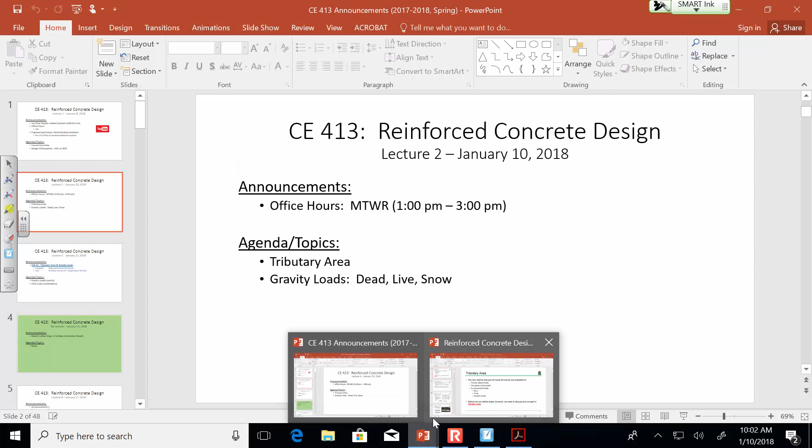All right, so I want to get into tributary area today, because by and large your homework 1 is going to discuss reviewing tributary area and gravity loads.

We kind of talked about this last time but didn't get into any major examples. Let me briefly recap. We introduced the course, but one of the big ideas we got across was this idea of uncertainty in engineering and the idea of a design philosophy. Instead of just blanketly applying a factor of safety, in structural engineering we apply different load and resistance factors depending on what we're talking about—different factors for dead loads than for live loads, etc.

So what I want to talk about today is the load side of things and look at tributary area and how you actually perform a load takedown. In other words, given a typical representative real-world structure and some representative real-world loads, how do you take that real-life scenario and turn it into a simply supported beam with a uniformly distributed load—something that we all can analyze and ultimately design. That's the point of what we're talking about today.

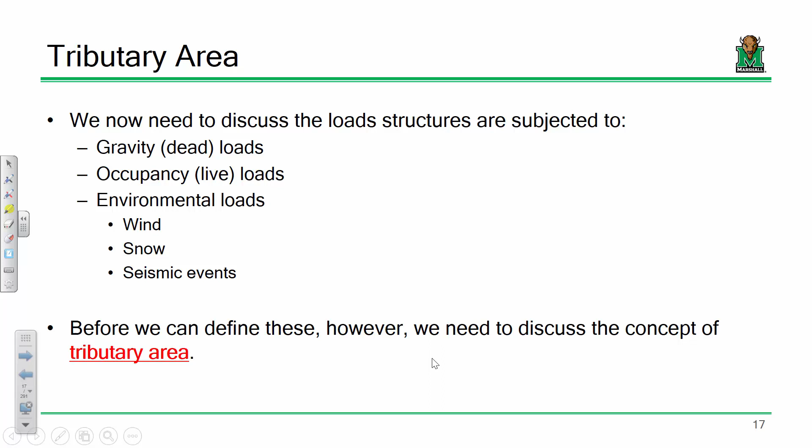In order to do that, you need to understand the concept of tributary area, which is how much of a given floor system a particular member is responsible for. We talked last time about how that's typically defined as halfway over. So if you have a bunch of floor beams supporting a given floor area, one floor beam is responsible for all the floor area halfway over to the next one and halfway over to the next one. That's how we're going to generally define tributary area.

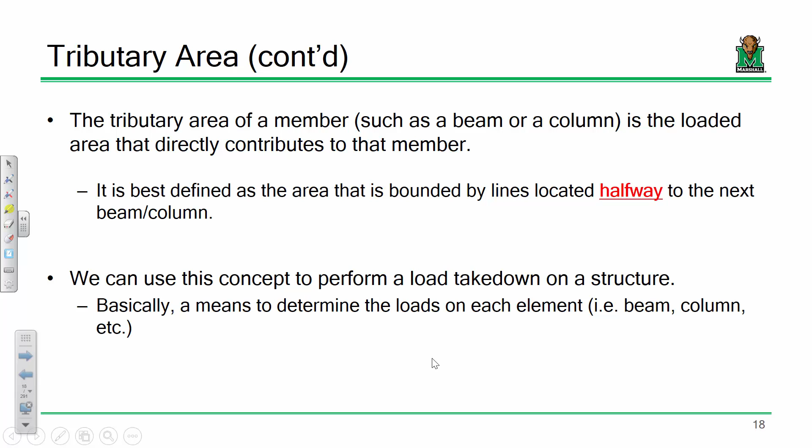So what we're going to do here in a little bit is take a representative floor system, very similar to this one, and take a floor load of about 20 to 25 pounds per square foot. We're going to take that load and start developing analytical models that we could analyze and then design.

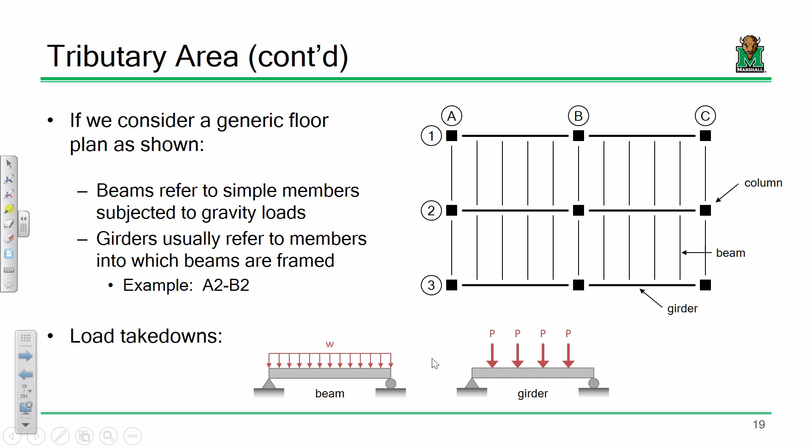So just so everybody remembers, think of this sort of like a hip bone connected to the leg bone type of analysis. If I'm standing on this floor, where does the load go? It goes from the slab to the beam, then from the beam to the girder, from the girder to the column, from the column down to the ground. Does that concept make sense? Are you okay with that?

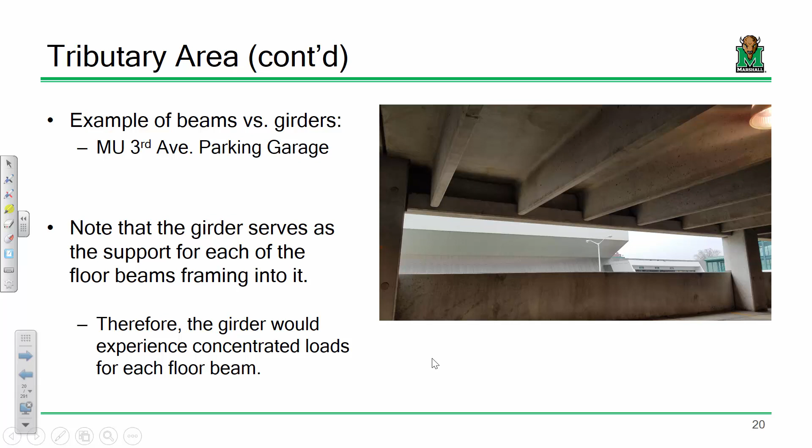Okay, so here's the floor system we're going to look at. The black squares on the diagram are columns. Imagine we're sitting in a helicopter looking down. We see the columns sticking out of the ground, and a series of floor beams going vertically and a series of girders going horizontally.

So for the example, we have a load of 20 pounds per square foot. What we're going to do is tributary area sketches for the following elements: a typical interior beam, a given girder, and a given column, though we can extend this to look at everything. Then we'll determine the load on a typical interior beam, the loads on a given girder, and the loads on a given column. Does that sound good? Are you okay with that?

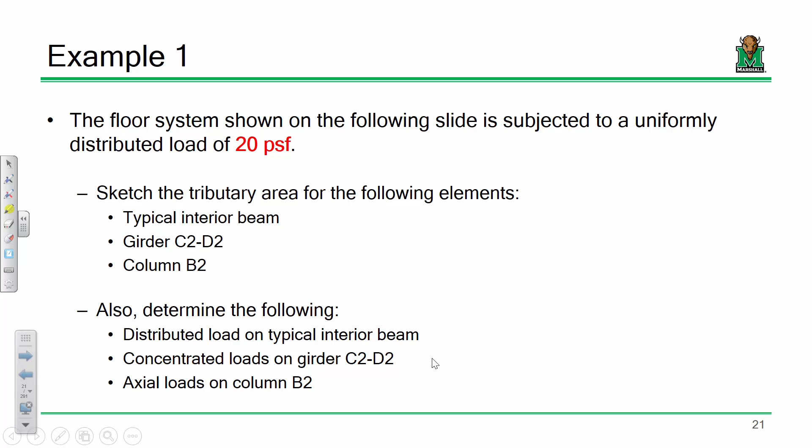Okay, so let's start off with a typical interior beam. Let's say we're looking at, let's see, we got C2, D2, C2, D2. Let's say we're looking at this beam right here. So just so everybody's familiar and aware, the tributary area for this beam is defined as all the area halfway over to the next floor beam and halfway over to the next floor beam.

Would you agree that the tributary area would probably look something like this? This would be the tributary area, how much that floor beam is responsible for. Anything past that on the left or right, this beam's going to take over. Anything on the left side, this beam's going to take over. And anything above this, well, this beam's going to take over. Does that make sense? You're just dividing up the floor into how much a given element is responsible for.

Make sense? Okay. Now, just so everybody's clear, how long is this floor beam? 30 feet, okay. All right, yes? Well, that's okay. So if you're standing in the middle, half goes here and half goes there. You see what I mean?

One thing to keep in mind, you're thinking about an individual person, but keep in mind when we look at live loads on floor systems, we're not really looking at individual people. We're looking at this as if we have an average pressure load. We've got maybe 30-some people in this room. What we would do is idealize this as something like 50 pounds per square foot. Even though different people are split up to different beams, on average this 50 pounds per square foot, half of it's going to go here and half of it's going to go there. Does that make sense? I see the temptation to treat individual people like, well, where does an individual person go? But we're not really treating it like that.

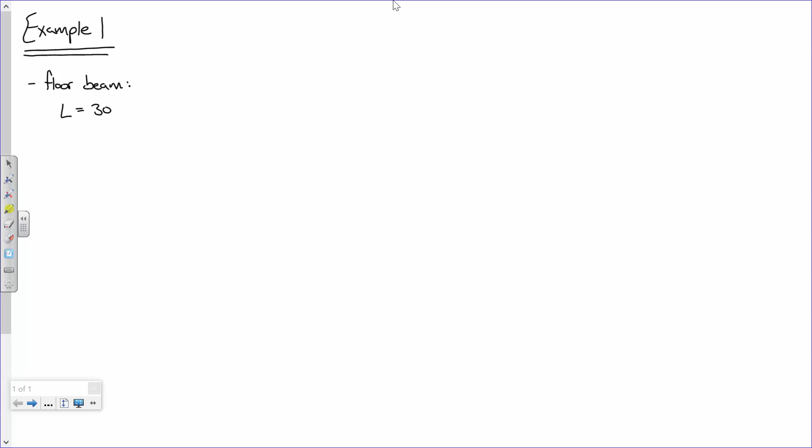And we'll call the tributary width 10 feet. Everybody okay with that? So while we're not going to directly use this right now, what would the tributary area be? 300 square feet. We're not going to use that right now, but we will use it later when we look at reduction. We'll get to that in a little bit.

Sound good? Now remember, we've got floor beams that are spaced every 10 feet, so if I were to look at this floor system, it might look kind of like this. I'm going to do my best to get my artistic representations accurate. I can do a little better than that. Okay, no, I can't, we'll just leave it at that. You know what, this is going to bug me, I'm doing this again.

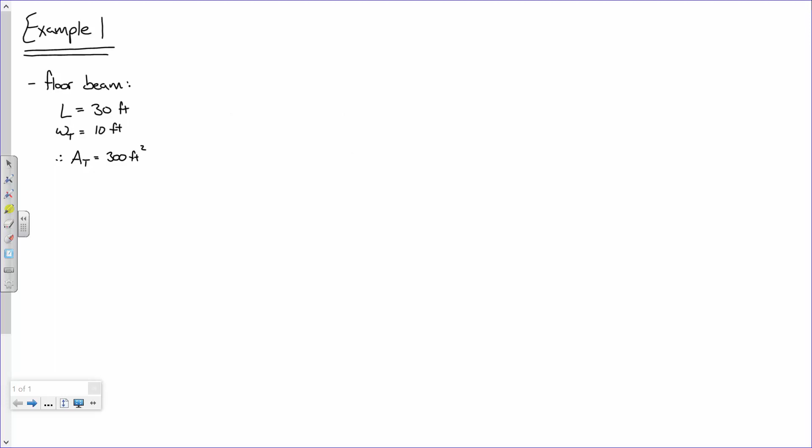There's a point I'm getting at with this. I sort of need three. Okay, I like that one better. Well, you can deal with it. All right, so let's say I've got floor beams and they're going on forever. Even though there's only like 5, we'll just say they're going on ad infinitum.

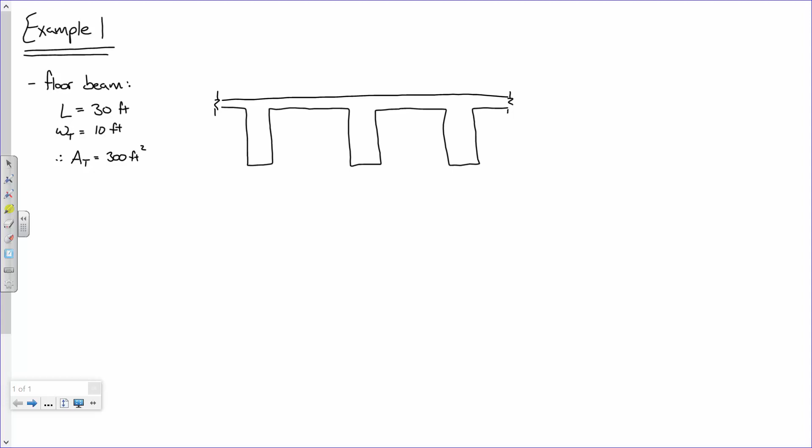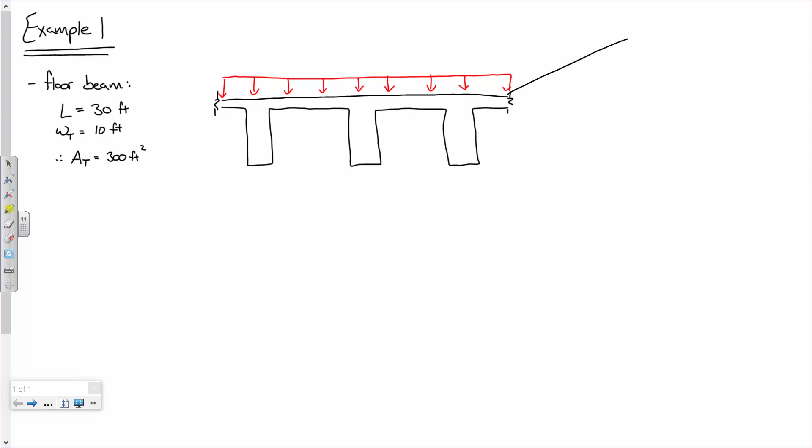Now, again, we're treating our load as if we have a uniform pressure load on this floor system. So imagine that you have a pressure load that looks like this. And keep in mind, this is 3D, okay? The floor system sort of goes like this. So you have a floor load, or pressure load, that's being applied over this entire floor system. So it's something like that.

Sound good? Okay, now just so everybody's clear on the dimensions, this pressure load is 20 pounds per square foot, and we've got floor beams that are spaced at, what did we say, 10 feet? Yeah, there we go. 10 feet and 10 feet, okay?

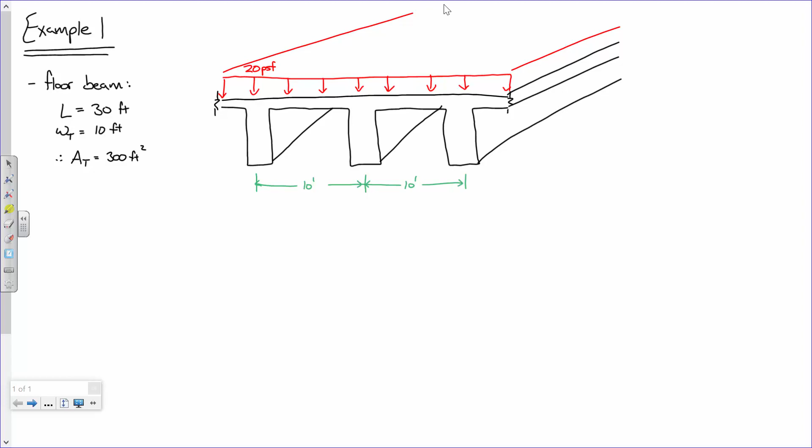Okay, and so this dimension is 10 feet. Let's see, this is testing out my 3-dimensional art abilities, my perspective. That's not bad, that's about the best you're going to get out of me. Thank you, thank you, okay.

Now what we're going to do is this: when we analyze a beam in structural analysis, we analyze it as if it was a line, just a single line, hinge, roller, etc. So what I'm going to do is take that pressure load and idealize it as if it was a uniformly distributed load along a single beam. In other words, I'm going to take this and turn it into this. I'm going to say, what if we were just looking at that beam, and instead of this pressure load, let's look at it as if it was just a single uniformly distributed load.

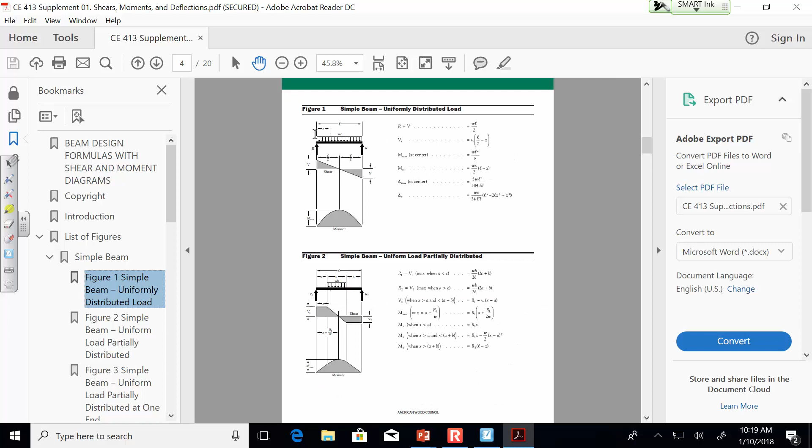If you go to the very first one, which is on page 4 of the handout, look right here: simply supported beam, uniformly distributed load. Here's your reaction, WL/2. So if you have 200 pounds per foot, 30 foot, plug and chug. What's the shear diagram look like? You go up, down - so down, lot to a little to a lot. Y'all remember that? Bam, there's your formulas.

I know you're sitting here going, now why didn't you give that to us last semester? Like, really? You show us this now? Well, the point was so that you would understand this when you got it. So you got to walk before you can run, right?

So what this - let me say this, okay? Because I know some of you are going to ask, well are we going to get any crazy, complicated structural analysis problems in this class? The answer is not likely, okay? This is not structural analysis, this is reinforced concrete design. Everybody in this room already proved to me that they can perform structural analysis because they passed the class, okay? That doesn't mean that you don't need to understand some basics, okay?

And I also want to emphasize that if you don't understand how to use these guides, don't use them - break out the structural analysis that I taught you last semester. But these guides can save you a little bit of time. In other words, if you have a simply supported beam with a uniformly distributed load and you need to know the maximum bending moment, you can do the reactions, draw the shear diagram, draw the moment diagram, because I know everybody here can do it, or you can say WL squared over 8 because it's right there, okay? So you can use it or not. I just wanted to make them available to you. Sound good? Any questions? Okay.

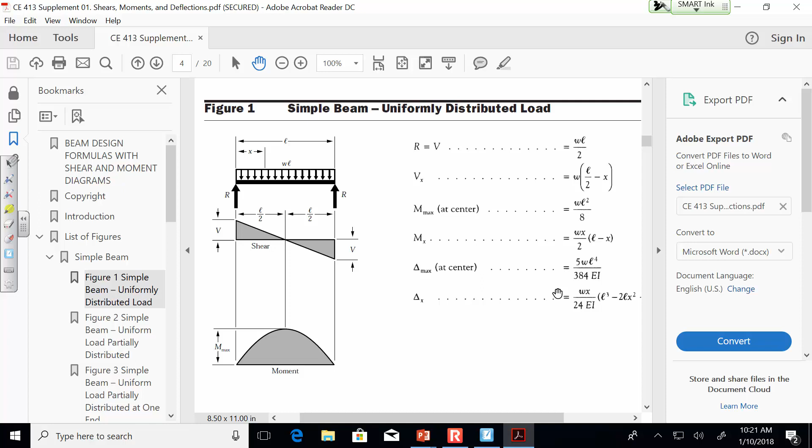Now, so I'm not going to continue this analysis portion any further because you've got this. And from here, if you all can't draw the shear diagram or the moment diagram, well then I failed as a professor last semester. I know you all can do this. So, all right, now - oh, wrong one.

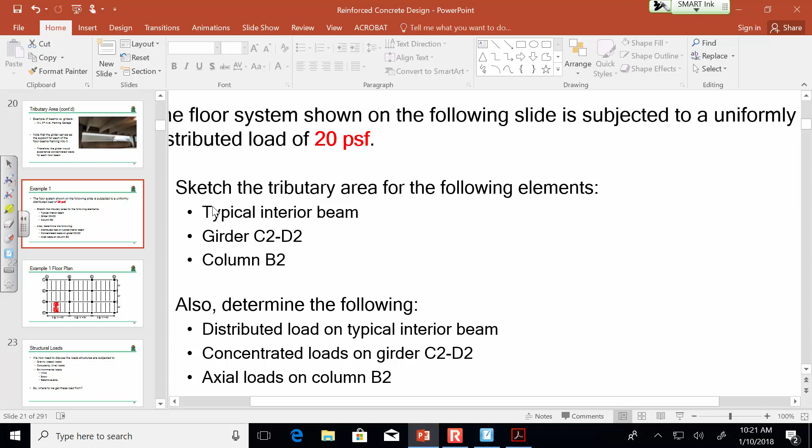Now let's go back to the example. Okay, so we've handled a floor beam, now let's look at a typical girder. Let's look at C2D2. Okay, so C2D2, we're looking at this right here. Okay, so here's our floor. Yes.

So, what you just said covered the first bullet point. Yeah, basically. Does it matter how we'd locate which one we did? It won't matter, that's a good question. So you're saying like which one that you did? Let me ask you this: is this one gonna be any different than that? They're all the same, yeah.

Now for girders and for columns, that's where the C2D2 or the column B2 comes into play, because that's where the grid reference comes into play. For a typical interior beam, it's not going to matter.

Now let me follow up with that. Let me ask you this: what's the difference between a typical interior floor beam and a typical exterior floor beam? I'm curious. What? These floor beams, and by exterior floor beams I mean the ones along the lines either D or A.

The difference between these floor beams is that the tributary width is only 5 feet instead of 10 feet. Make sense? So theoretically, these floor beams would be a little smaller. They're not as responsible for as much. Okay, now that is only if they are subjected to floor loads. That might not be the case.

What goes all the way around the outside of buildings? The wall, the facade, either brick or precast. And if those are mounted on, let's say, the exterior beams, then they're going to be subjected to a lot of load, not just the floor load inside the given floor, but they're also going to be subjected to that load around the wall.

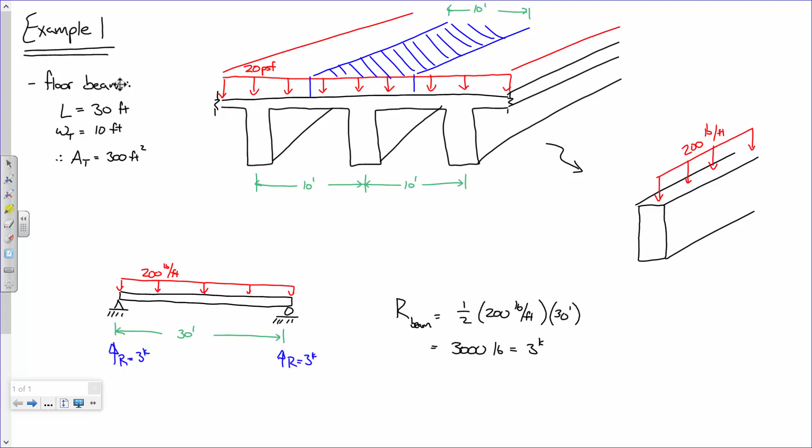Let me go back to this. Here's my beam, right? And we said that - this has a support reaction of 3 kips, and this has a support reaction of 3 kips. Where is that beam framing into? Is that connected to the ground? No, it's connected to the girder. So why don't I do this - instead of treating my girder as if it's another beam, why don't I do this?

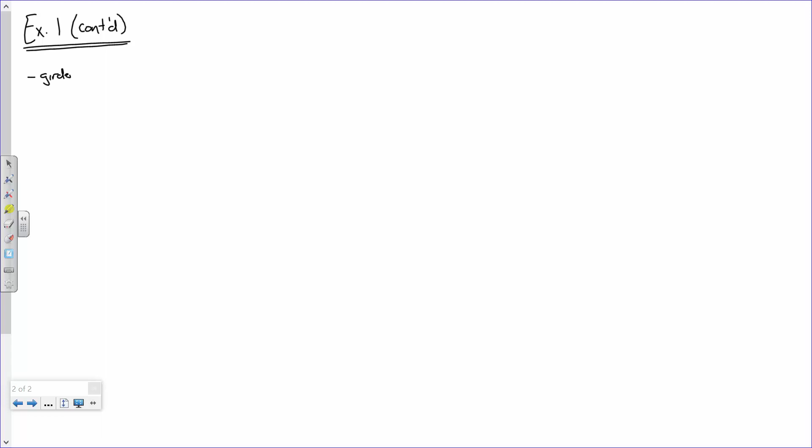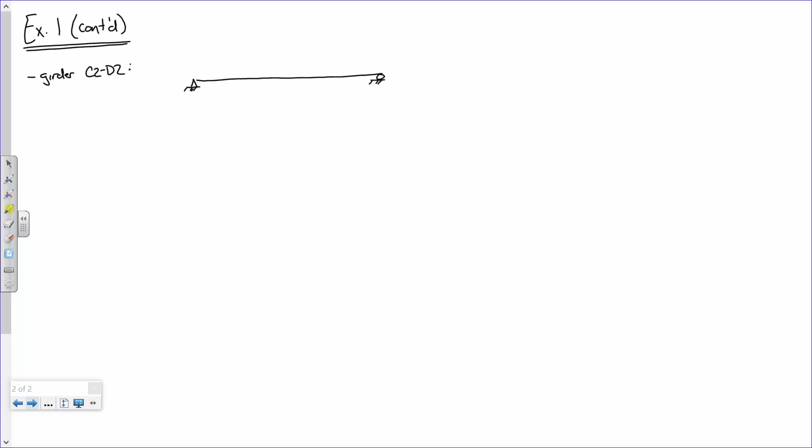So girder C2, D2. Why don't I do this? Why don't I say I've got an element that's how long? How long is the girder? 50 feet. But instead, I've got 4 point loads framing into it. So this is 10 feet, this is 10 feet, this is 10 feet, this is 10 feet, and that makes this 50 foot long.

Now, how much are each of those point loads? Somebody's saying 3 kips. Are they 3 kips? They're 6 kips, right? Why are they 6 kips? Because there's 1 on each side, right? So here's the floor system. I've got this floor beam carrying 3 kips over, but I got this other floor beam that's carrying 3 kips over too. So I got 6 kips here, 6 kips here, 6 kips here, 6 kips here.

What if I was doing this one, C1D1? It'd just be 3, right? Make sense? Because, all right, here's a floor beam, right? This floor beam has 3 kips here and 3 kips there, right? But so does this one. So you're taking the 3 kips from what we got before. This floor beam had a reaction of 3 kips on each end.

But that's the same for all the floor beams in the system. What I'm saying is, right here at this point, how many floor beams frame in here? 2, right? Think, this is a floor beam and it's got support reactions. Those support reactions are going right there. So I've got 3 kips from this side, 3 kips from this side. Does that make sense? So that beam is 3 kips per foot. No, the beam, not the girder. No. All right, let me do this, okay?

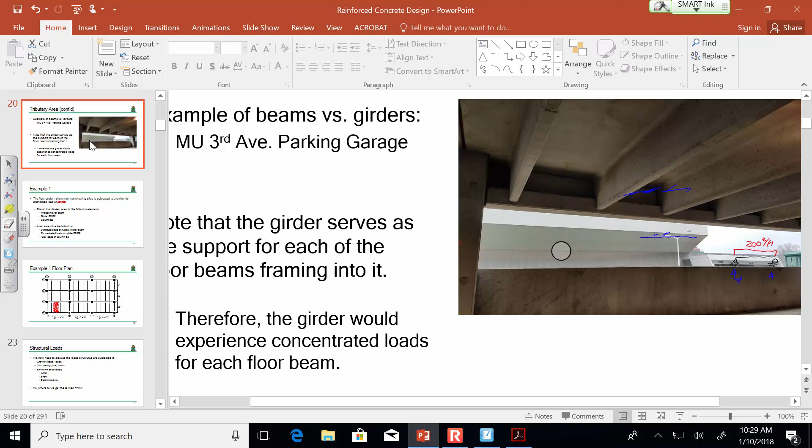Think about this. Here's the beam, right? The support is not the ground. The support's the girder. That 3 kips is going right here. But keep in mind, the difference between what you're seeing in this image and what we're looking at with this beam is that there's another beam on the other side of it. So there's 3 kips here and then 3 kips there. Does everybody else see that? Everybody okay with that? Okay.

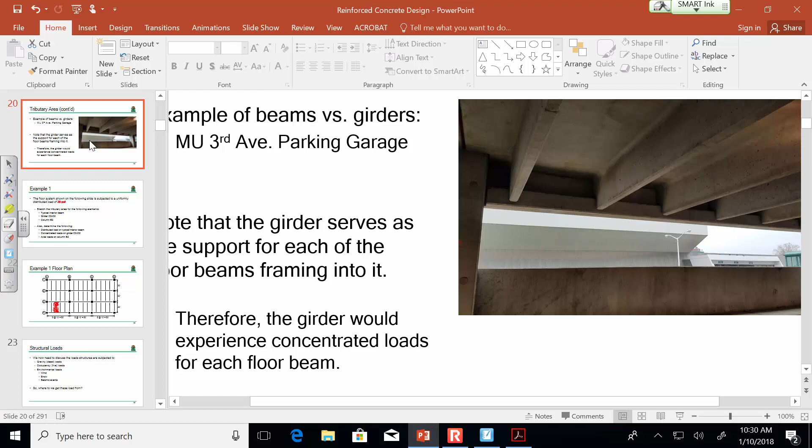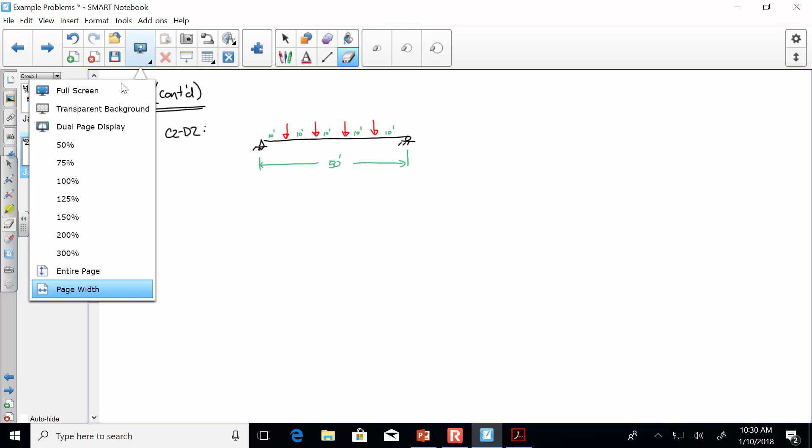So I propose, now I'm going to have to redo that here in a second. I propose that if here's my analysis model, this is 6 kips, this is 6 kips, this is 6 kips. Exactly. Does this all make sense? That's where the beams are going in. Exactly. So what would that make the reactions then in this case? 12, right? This is 12 kips, this is 12 kips. Is this making sense? Is everybody okay with this? Hip bone connected to the leg bone, right?

Now, what's my shear diagram going to look like? I'm just curious. It's going to go up 12. Then it's going to kind of look like a stair step, right? It's going to go boop, boop, boop, boop, boop, boop, boop, right? Make sense? Yes. Yeah, and I'm going to get to that here in a second. Just bear with me. Okay. Any questions so far? Okay.

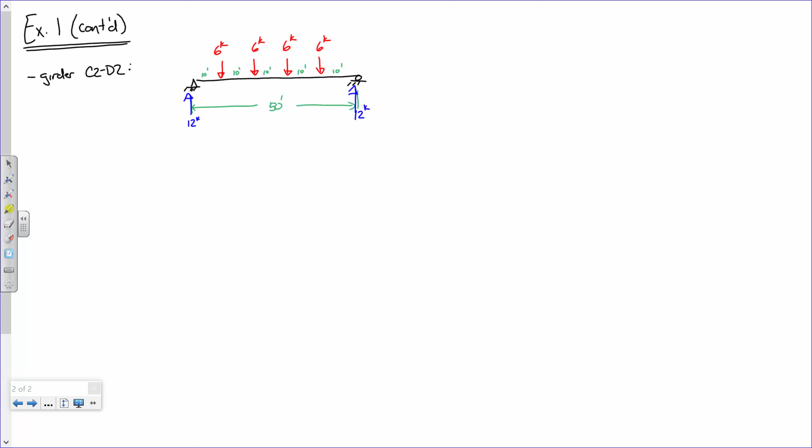Now Mr. Masters is asking, what if you treat it as if it's a distributed load? Okay, you will get slightly different answers. The question though is, when do you do one versus the other? Here's my answer. And this is a rule of thumb. This is where engineering judgment comes into play, but statics would dictate that you always do this. Hip bone connected to the leg bone. You always frame support reactions into the girders. Girders go to the column go to the ground. Now, if we're looking at a given girder, we have what?

1, 2, 3, 4 floor beams framing into it, right? What if we had 40 floor beams framing into it? Just bear with me, okay? You would agree that the shear diagram for this structure right here looks like this. We'd go up, we'd go over, go down, go over, go down, go over, go down, go over, go down, go over, go up, right? That's with 4 floor beams, right? Let's say we had 40. If you had 40, it'd be like, right? That's essentially what it would look like.

Well, if it's that many, why not just treat it as a distributed load and just do that? You see what I mean? Okay, so you want my rule of thumb? If you have more than 4 floor beams, just do the distributed load. If you have 4 or less, do this. Does that make sense? You will get some slightly different answers, but it's so minor that it doesn't really matter.

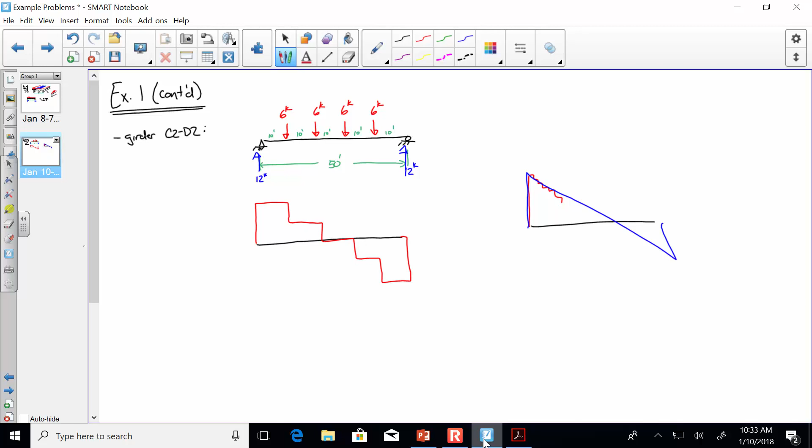I would do it the area way if you had like 5, 6, or 7 floor beams. Exactly like you did this. The only difference is the tributary width would be 30 feet and the length would be 50 feet. Exact same thing, literally just changing numbers. Does that make sense? Everybody else okay with this?

If you got any questions, this is the time. We're also looking at the beams that are going directly to the columns and just kind of disregarding them—they don't go to a girder. Yeah, we're getting to that here in a second, I'm glad you brought that up. So the beams that are going into the columns, that's coming up here in a quick second.

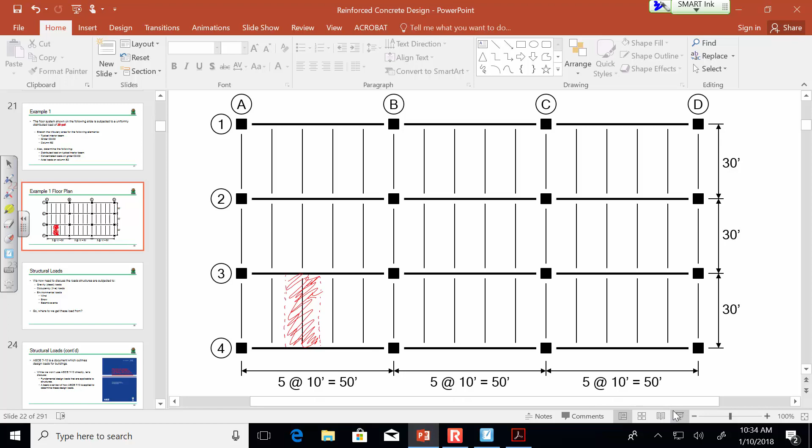Yes? No, well hold on, let me see. What is the number? Let me see, so let's do the math. So here's the, let me do this. Here's the girder, so this is, that's our tributary area. The width is what, 30?

And what was the load? 20 pounds per square foot? So 20 times 30, yeah, it's 600. Did I do that right? 600 pounds per foot, does that make sense? So 600 pounds per foot over a beam that's 50 foot long. Does that make sense? Literally just changing the numbers.

Everybody good? Now, there is an added benefit to breaking them up into point loads, and that's when you look at the columns. Let's look at the columns. Okay, let's look at the columns. So what column are we looking at now?

B2? So what is the tributary area for B2? I would say it looks something about like this. Is that about right? Everybody okay with that? What are the dimensions? What did you say they were? 50 by 30, right? Because if I look on the x-axis, that's 25 and that's 25, so that's 50. On the y-axis, that's 15 and that's 15, so it's 30, right?

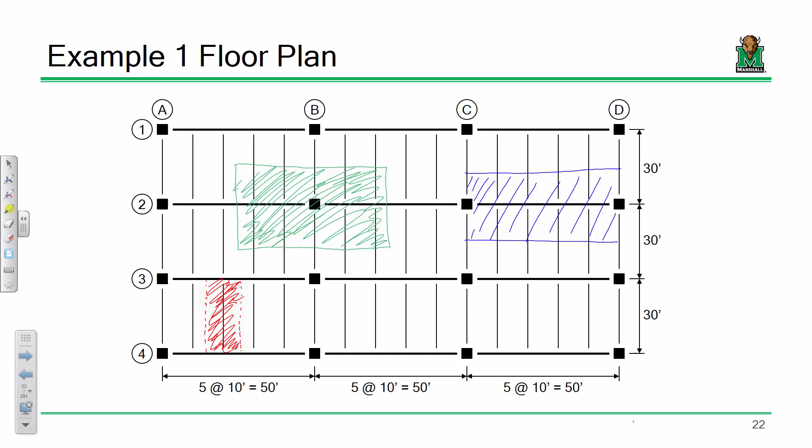Sound good? Now, the benefit of treating them like support reactions, hip bone connected to the leg bone, is what happens with the column. Like, check this out. Okay, all right, so let's look at the column. Okay, so watch this, so method 1.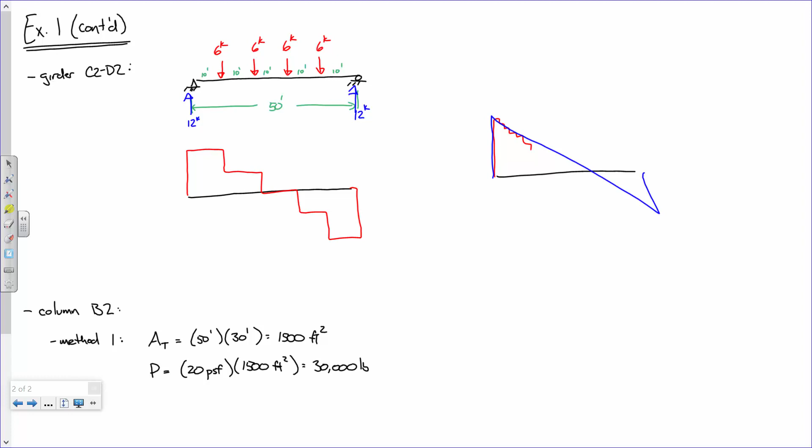What did we say that the tributary area would be? It'd be 50 foot times 30 foot. What is that? 1,500 square foot, right? Now, what's the pressure load? So would you agree that the load on that column is 20 pounds per square foot times 1,500 foot squared, which is what? 30,000 pounds, or 30 kips. Would you agree with that?

Okay, now Mr. Filsinger had a question earlier. He said, well, what about the columns? There's beams and girders framing into it. Watch this. Remind me, what was the reaction that we calculated for a beam? 3 kips. And what was the reaction that we calculated for a girder? 12 kips, okay?

Let me ask you something. Here's our floor system. If I look at column B2, how many girders frame into B2? 2, this one and that one. How many beams frame into B2? This one and this one.

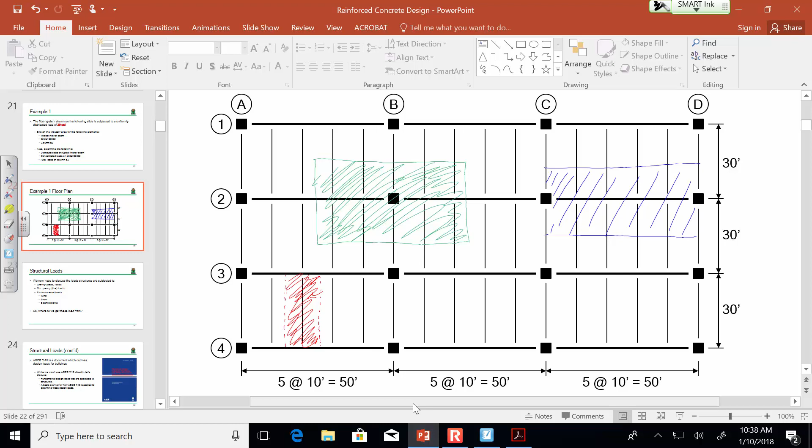So why don't I do this? If I could say that the load on that column is going to be 2 beam reactions plus 2 girder reactions, which is 2 times 3 kips plus 2 times 12 kips. And what does that come out to be?

What do you think? We learned enough today to take Friday off. I didn't say that. Good job. But yeah, good effort, good effort, good effort. What do you think?

Now think about this though: 20 pounds per square foot, that's not a lot of load, but just from one floor we're getting 30 kips on just a single column. Another thing to keep in mind, this is looking at this building as if it was a 1-story building—we're only looking at 1 story. Imagine if this was a 10-story building, we'd have 300 kips on the ground, right? We'd have a column, and as the column went down, it got heavier and heavier and heavier. Does that make sense?

What do you mean start at the top? So you're analyzing a 10-story building, would you start at the top? Because there's nothing above it that you have to worry about. Well, there's snow—I mean, just your normal PSF load, you're accounting for the snow on top of the roof and then going down from there. Let me analyze it, let me answer it like this. Okay, let's do this.

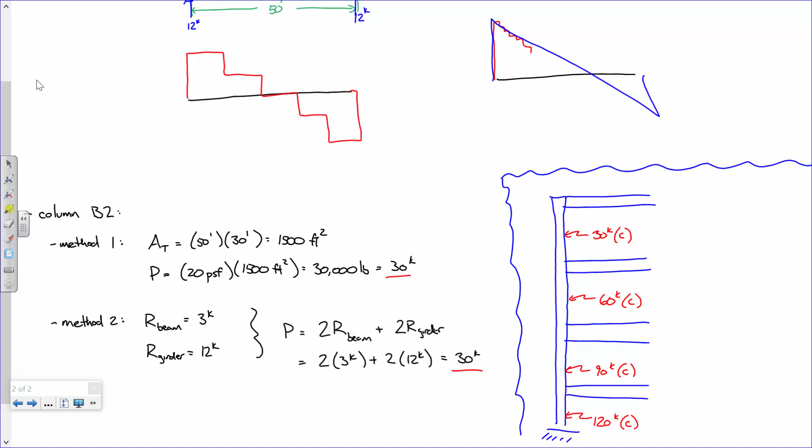What do you think? Any other big questions? You like this? Now you senior design folks are going to get a lot of experience with this here in a little bit. All right. Well, I guess you all will too if I'm teaching it next year. So I'm just trying to get to like 1050. All right, okay, are there any other questions?

So are we ultimately doing all these calculations to be able to say how big our columns are? Yes, that's what design means, to size the individual elements so that they can safely resist those loads. You've got to know what the loads are in order to do that. So yeah, that is the ultimate end goal.

Okay, let me talk a little bit about loads because we need to get into this a bit. We'll continue this on Friday, and then you'll be well prepared to assess your homework. But let's talk about loads. There are really 5 main load components that structures see. 3 of them act in the direction of gravity, which is what I'm mainly concerned with, that you have the ability to assess, and 2 of them act laterally. The 3 that act primarily in a gravity effect are dead loads, live loads, and snow loads. The 2 lateral effects we deal with, meaning side to side, are wind and seismic events like earthquakes.

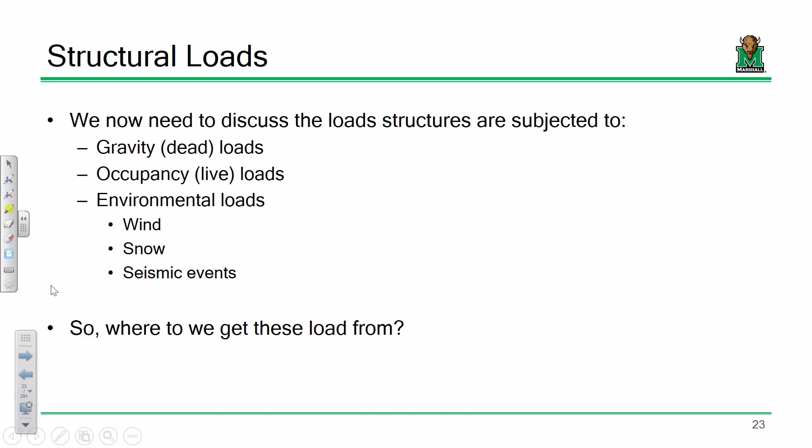But where do you get them from? Where do the loads come from? Like I said, a library is around 150 pounds per square foot, a classroom can be like 40 to 50, something like that. Did I just make that up? Where did that come from? Well, they come from specifications, from published standards within our engineering community.

Now, I know everybody in this room has heard of ASCE, but up until now, ASCE has probably been little more than a social organization where you build a concrete bowling ball, a canoe, or a bridge every now and then. And that's true, ASCE provides that function, but they are much more than that. One of the main roles ASCE plays in the engineering community is providing a lot of the technical standards that we use as engineers, producing standards on how to design dams, roads, and so forth. One of the most commonly used standards is ASCE 7.

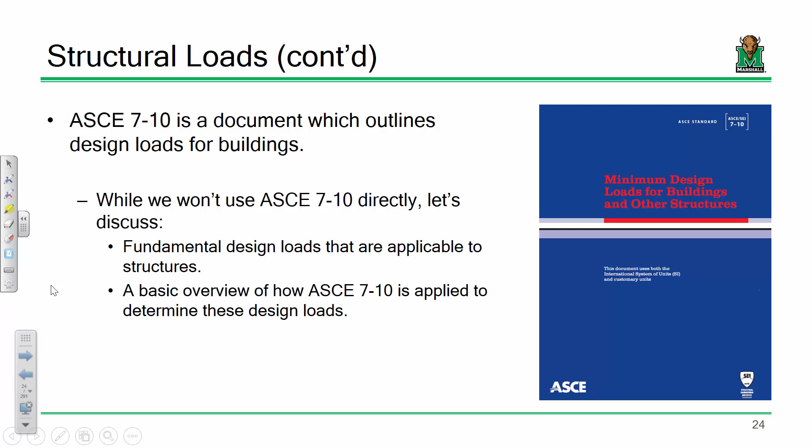ASCE 7 is the standard that delineates minimum design loads on buildings and structures. I have here ASCE 7-10 because that came out in 2010. We actually recently updated to ASCE 7-16, which came out in 2016, but there's not a lot that really changed between ASCE 7-10 and 16 that would affect us. A lot of the gravity load provisions haven't changed for years. The maps might have changed, but I've got an online tool that'll help you with that.

Let's take a moment and talk a little bit about some of these loads. I want to start off with dead loads. Now, whenever I use the term dead load, really what I'm talking about are loads that are stationary, loads that don't move. I am obviously not a dead load because I'm walking right now, walking across the room. But dead loads are loads that are stationary - we're talking about the structure's own self-weight, any permanent attachment, anything that's not going anywhere. And by and large, I'd say 90% of all dead loads that we consider in structural engineering are self-weight, the structure's own self-weight. Now, the most common civil engineering materials that we use are steel and concrete, okay?

Now, just so everybody is aware, the unit weight of steel is 490 pounds per cubic foot. That's a number that you'll want to drill into the back of your head, though not so much of importance for this class.

The one that's important for this class is the unit weight of reinforced concrete. Now, the unit weight of reinforced concrete is variable. It changes. Those of you who had civil engineering materials last semester did the analysis of everybody else's data and calculated unit weights, and they were all over the place, but not crazily so. They did have a little bit of a range.

One thing that should be noted from what we did last semester with the unit weight of concrete: what did those cylinders not have inside them? Rebar. They didn't have any rebar, any reinforcement. So reinforced concrete is a little heavier than regular concrete.

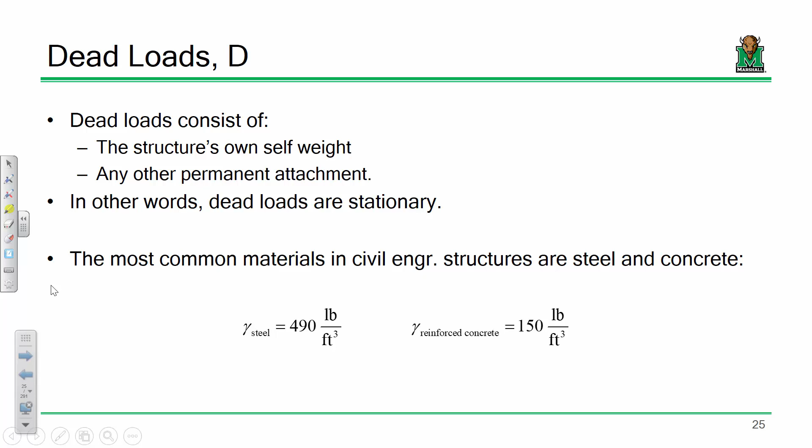What we typically assume in civil engineering is that unreinforced concrete weighs around 145 pounds per cubic foot, and to account for the reinforcement, we add a little bit. So 150 pounds per cubic foot accounts for a bump in weight due to the steel, since steel is heavier. So unless otherwise stated, we are going to use 150 pounds per cubic foot for unit weight for everything we do. We'll reference that number quite a bit, so it's something you'll want to have burned into the back of your head.

Now, if there are any other weights or values that you need, there are really two big places you can get them. One is ASCE 7. If you open up ASCE 7, there are a host of different floor loads, like common floor dead loads. Are you looking at ceramic tile? Gypsum fill? Normal weight concrete flooring? Metal deck? For each of those flooring types, you have a different value — for instance, quarter-inch ceramic tile weighs around 10 pounds per square foot, which is the upper bound value you should use for design.

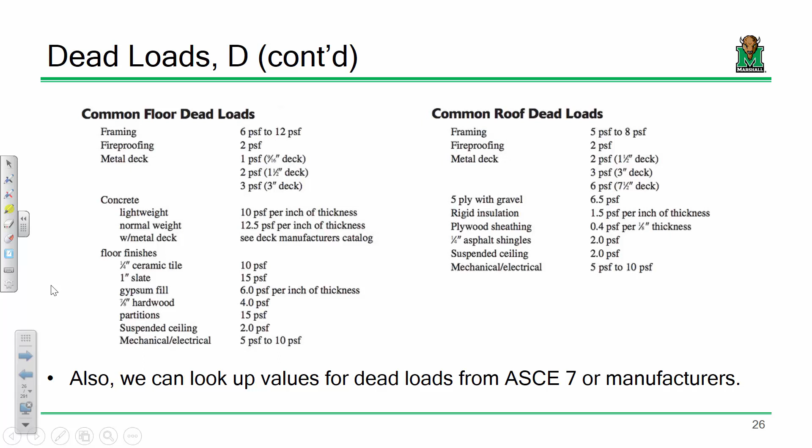If it's not in ASCE 7, the next place would be to call the manufacturer. If you're using some floor system or deck pan, either call the manufacturer or look it up in their catalog — they'll have those weights listed, so just use those. So those are really the two big places you would get those loads. The third would be to just compute it.

Now, this is probably where I'm going to close it, because this is an important aspect. When we look at beams, the most common loading scenario we will consider in this course is a simply supported beam with a uniformly distributed load. The reason why is because all beams must be able to withstand their own self-weight. Let's look at this beam.

Let's say it's a rectangular beam, B wide, H tall, and L long. So the volume of this beam would be length times width times height, right? Now, let's say this beam weighs 150 pounds per cubic foot. If I multiply that by the volume in cubic feet, that tells me the total weight of the beam.

But that's the total weight of the beam, and that total weight isn't just lumped right in the center — it's distributed over the length. So if I take that total weight, say the beam is 20 foot long and weighs 6,000 pounds, its weight per foot is 6,000 divided by however long it is. So a shortcut way to determine how heavy a beam is per foot is to take the unit weight and multiply it by the area, B times H. Because you're ultimately multiplying by the volume, but then expressing it per foot — so BHL divided by L, you're just canceling out the L's.